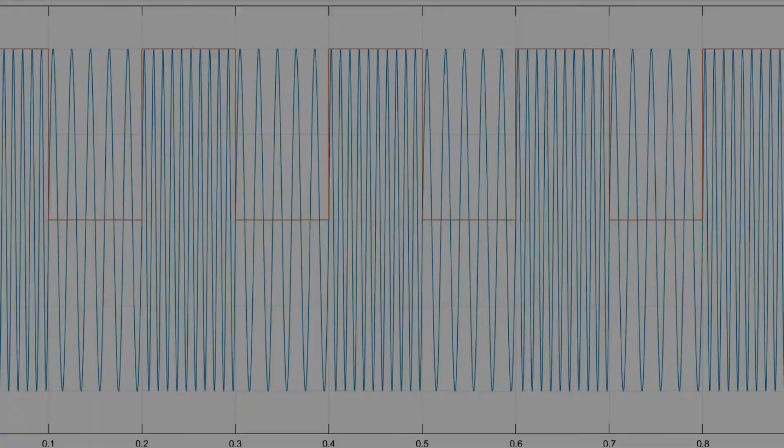In this task, we were able to achieve the objectives of understanding the concept and being familiar with the topic. In terms of the topic, FSK, MATLAB Simulink produced a good outcome. MATLAB Simulink allows the researcher to have a better understanding of how to create an FSK by using block diagrams, as well as examine the FSK outputs.

The FSK output of high and low frequency of 100 Hz and 50 Hz as set in the block diagram is shown in the first part of the activity with its given setting parameters. At this point in the activity, the collected data revealed a 5 Hz pulse generator frequency with 10 alterations. Furthermore, it demonstrates that there are certain chances for no discontinuities on the signals because both signals are multiples of 5 Hz.

In the student's observation, this may not be accurate because the pulse generator frequency, which is 5 Hz and divisible by the stated parameters in the high and low frequency, may produce discontinuity if only one of the signals or both are not divisible by the pulse generator frequency.

To finalize today's activity, here is the time-lapse where John Patrick and I created and simulated the given circuit for frequency shift keying.